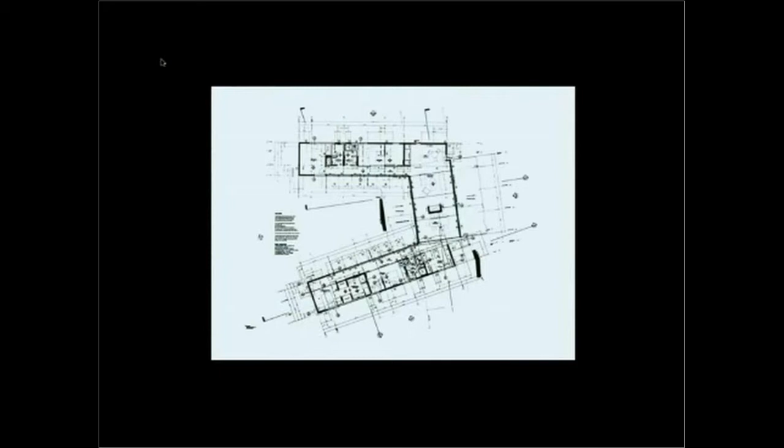The family room is concentrated around a structural pier that assimilates all of the seismic forces as well as the lateral forces of the house, and brings them down in a chimney, which is then the focus of the house. It also provides the only real kind of clear, separate frame for the house in terms of establishing a point of connection to the ground. Everywhere else, we tried as well as we could to float the house.

The house is shielded on all of its sides by a set of movable screens that are able to not only protect the house from burning up in the event of a brush fire. These are perforated aluminum corrugated screens, but they also are able to modulate light, to be adjustable to an infinite number of light conditions. They really call on the user to engage the house through its use and operation.

I really like the idea that the house is this kind of uncertain, unspecific, not exactly related indoor-outdoor space. The idea is that this particular screen system, which is lifted from a garage door opener system into the caliber of a movable sunshade system, establishes on the perimeter of the house a kind of shaded area that defines, expands, and contracts the living area of the day-to-day space.

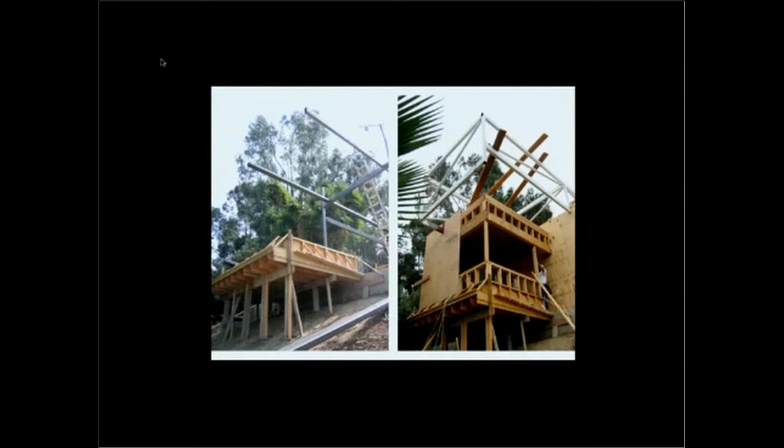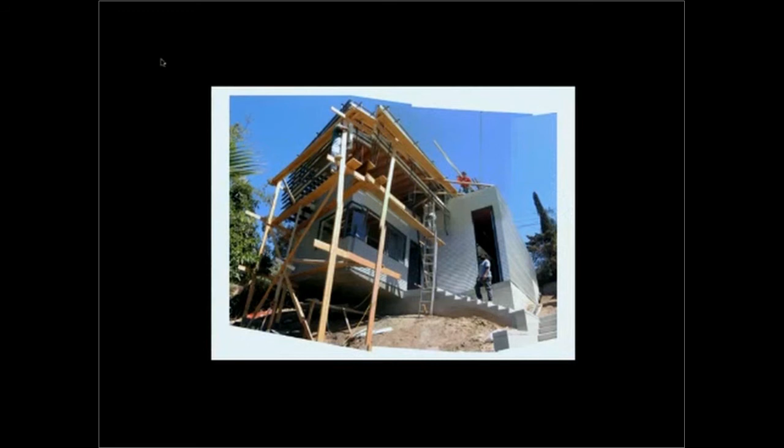So we framed what turned out to be a kind of bird cage up there, and worked on it in a way that was really about making a space with a set of light circumstances around it, a series of light monitors and light-reflecting and light-providing shades. The house was framed as a system that delivered a capacity for understanding light, a system that one would really be able to engage.

I like showing the making of architecture because I don't think the finished photo is always the best one. I really enjoy showing and describing architecture as it's made and in the process of being made.

But when you look at the final piece, you really resolve it as a broadly cantilevered work surface. So the floor of the studio cantilevers and floats and hovers above the hillside. The light screens above bring indirect light into the painting studio and enable the painter to continue their work.

She's kind of bothered by really strong direct light. And here she is working in the space.

For a lot of artists, I think the way to work is a really profound experience, and the relationship to their environment continues to provide an understanding of how the work itself evolves. I think that relationship to the way artists work, and the broad spectrum of relationships architects work with, really matters. It matters how people work, how you develop work, and how the process of developing work imagines architecture.

This is a corrugated, basically cement panel on the surface, glazed at the top with a series of fins that simply deflect light.

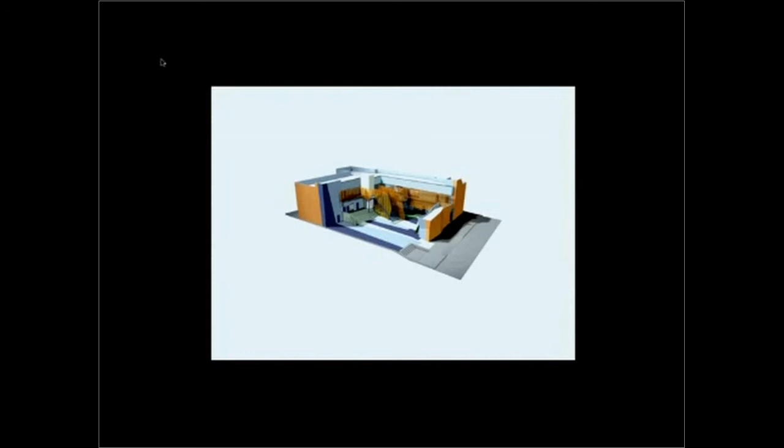When the school came to us and asked us to convert the building into a school, what we tried to do is use what the building lacked, what it missed, what it hadn't included in its structural diagram, to reimagine it differently by adding to it. So what we did was surround the building with a stabilizing system, which consisted of a light stabilizing system, a soccer ball stabilizing system, and a seismic load stabilizing structure that enabled the upper levels to function as exit corridors and outdoor teaching spaces, and the downstairs to provide more of the functions of a playground.

During the construction, we studied this a lot. The slots and slats of the screens you see are made of a product called Nexwood, which became interesting to us not because it was about the future or made of wood, but because it's made of a wood binder pulp recombined with resins into something of greater durability than any wood, but also more dimensionally stable, which made obtaining the curves we were looking for really fun to play with.

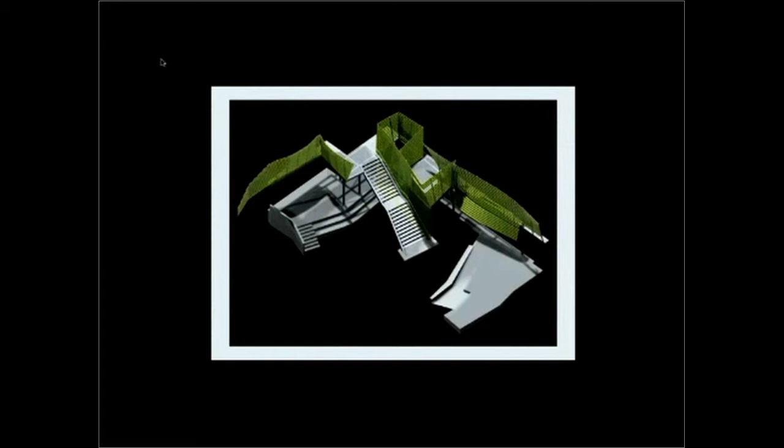The school then uses those spaces both as refuges, as places to hold graduation and so forth, and in the day-to-day use of the playground as a place where kids can just gather. So these are the elements that we added - they're actually the architecture of the school, not the school as a whole. Our contribution to the building was primarily a set of decks built up to stabilize the parking deck, in addition to the seismic system - everything that's green up there - and the circulation system for the exiting required to operate a school.

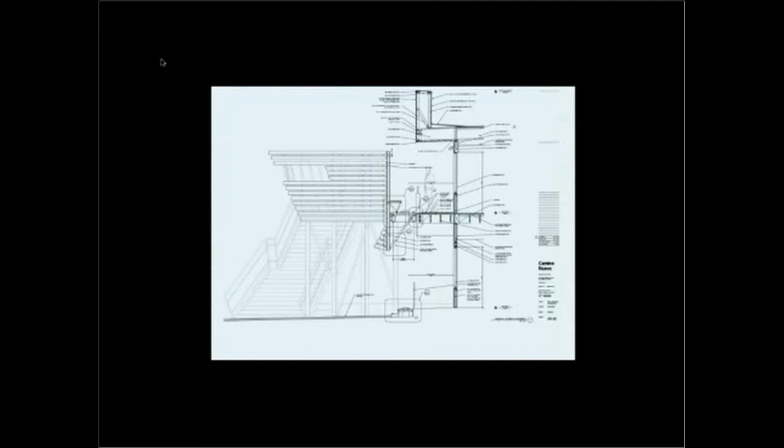I'm adding the sheet from the working drawing set simply because it makes very clear where your role as an architect, in a way, and the existing building suddenly get blurry when the two systems start coming together - right where that framing meets the deck. There's a set of interfaces which to me are really an important part of how architecture operates, which is by interlacing itself with what exists in the world - we find a greater voice for the practice of the profession itself.

These are showing a set of variations, which everybody today would be kind of bored with, but at the time were interesting enough to us because they show variation within a framing system that allowed us to obtain a curvature that was solar resistant. In other words, it provided shading, but it also was a deflective surface that protected the upper classrooms from downstairs play.

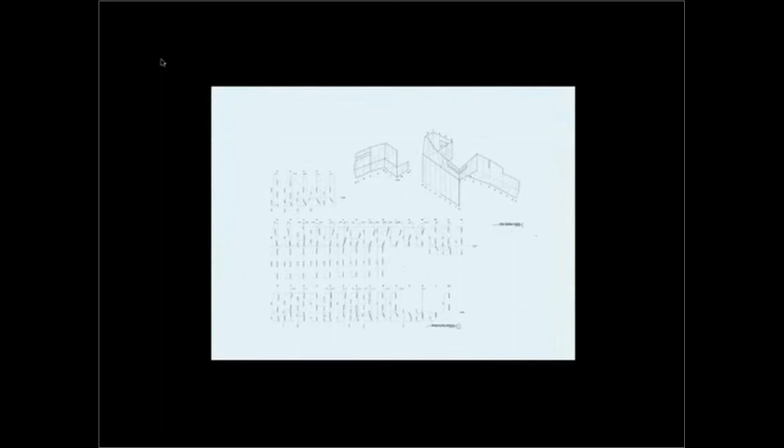And so behind those screens, there's a set of outdoor reading spaces and classroom spaces, so that in California, where it happens to be comfortable most of the year, learning and the idea of learning really becomes embedded with - well, why do you need to be inside all of the time? You can also be outside, and you can do it in a way that has all of the shelter and protection that little kids might require.

I think it's important to note that the school was invented as a notion for a priest who ran, and runs, and continues to run a sort of employee-owned corporation for first-generation immigrants from Guatemala. These are the kids of families who go and work on the west side of Los Angeles - they basically clean homes. Their kids were left as latchkey kids, and now instead of staying at home, have a school to go to. It's really his imagination, and working with him, that's made a school - not a daycare, for example - come through.

The streetscape happens to be something that's fairly cloistered - it's in a fairly tough part of the city. We really liked working in the inner city, in the sense that we don't see it as a no man's land, but rather as a man's land that needs a different set of rules and requirements. So we tried to make up a landscape - we tried to bring a set of opportunities for the neighborhood, instilling something they haven't seen, like a set of trees. Believe it or not, in some places, just seeing landscape is something new. So it offers a whole new way of gathering for these kids who beforehand just were at home.

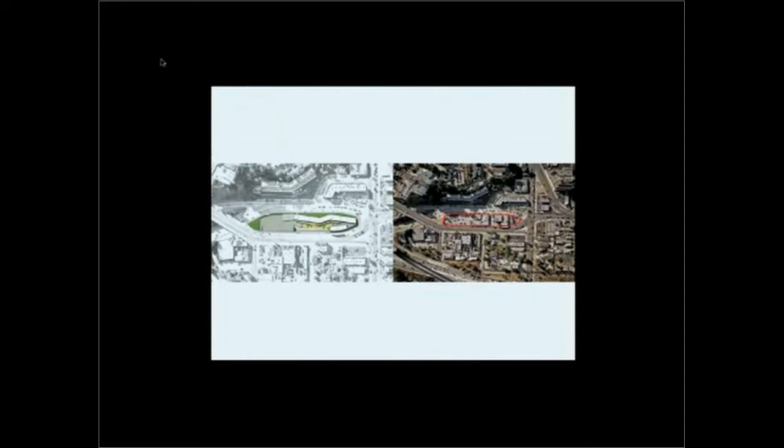So this is life in micro. It's really a way that you have to learn how to work when operationally you're very tight, when intellectually what's at stake is very broad, and when the means of doing it are limited.

These are just a couple of the thinking points during the process, but the thing that seems really interesting to me is the elaboration of the shaping of the site to the shaping of the building. So the building and the site are confluent. They're the same. The building and the site, because of their close fit, are embedded into one another.

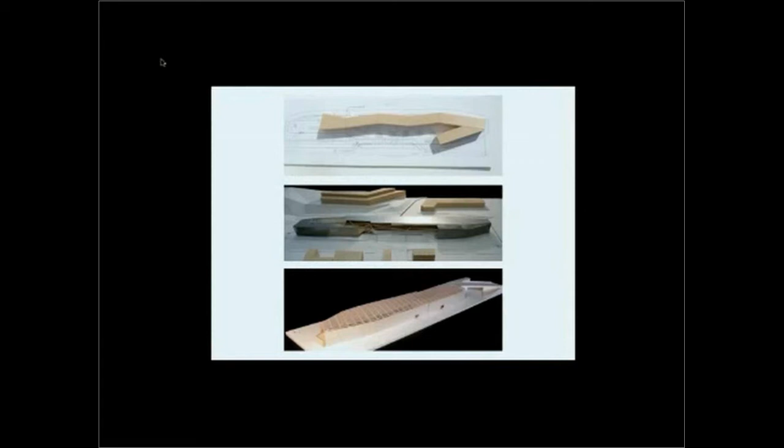The S shape, the way that we took charge of the site, was really by saying, okay, if we string the classrooms together, we're able to get a greater fluency between how they all interrelate, between what's downstairs and what's upstairs. But to the street, we need to get a kind of slightly tougher edge.

So we laminated the exterior with a perforated aluminum screen, behind which we've been able to paint a sort of color field. And the aluminum screen itself has been anodized with color. So we create separation through a kind of active pattern on the building.

This is in a very highly trafficked area of the city, so people are zooming by at 80 miles an hour all the time. And instead of seeing that as something we needed to resist, we actually learned from it. We learned how to move with the traffic, to move a building through the traffic. And to me, this speaks to a way that architecture has to look at the world around it, not necessarily only as something that needs to be resisted, but rather something to pick up from.

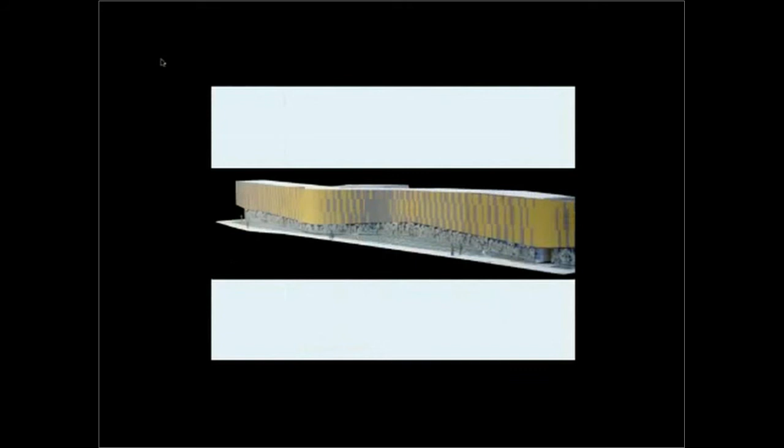So I think the reason I'm showing this is particularly so that you can see the wrapping. The volumes themselves are very, very simple masonry block. It's a very cheap building to make.

And then over that, we've wrapped these other layers of mitigating surfaces that deal with noise, that deal with growing stuff, that deal with light and sound and so forth, so that the architecture layers itself into the main core of the building as a kind of intelligent system that's responsive to the conditions immediately around it.

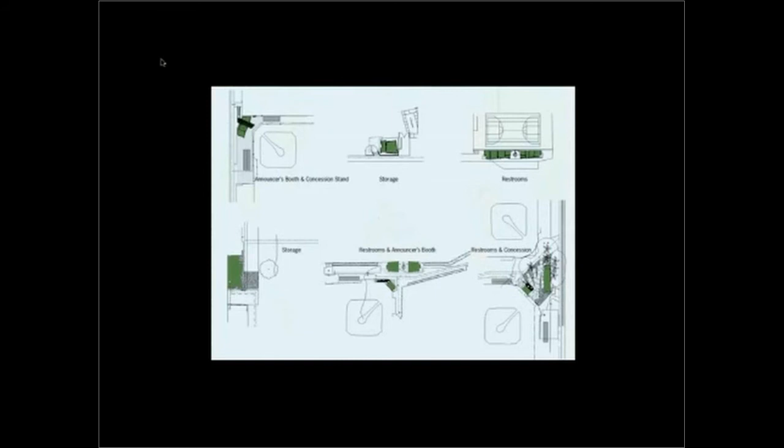These are just all the little parks buildings: storage, restrooms, announcers booths, concessions and so forth. These are the little typological plans that are part of the array of park systems. And then the buildings themselves turned out to be more like little worms that work their way through the landscape, very simple post and beam systems with prefab panels on them.

The prefab panel was what we decided to take on, through milling technology at the time, by calling the manufacturers and asking, does it really matter if the surface is like fake rock? Could it instead be a wave, or a set of dots, or some other kind of surface that matched what might be going on in the park, while still working exactly within the system without demanding any change to how the factory set things up? So our intervention with the factory, with the new technology that enabled us as architects to operate with the community, became a conversation that took something that only intended to be a bathroom and made it into a work of architecture.

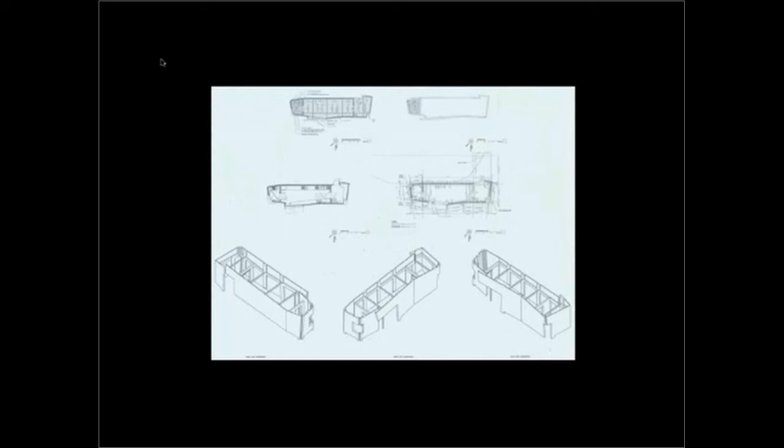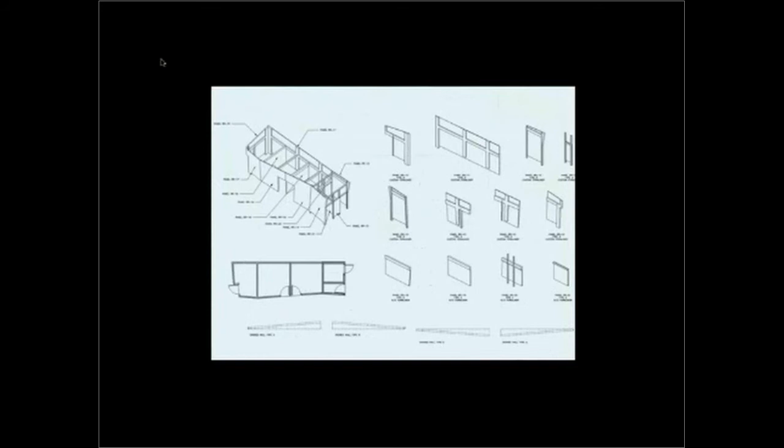So the precast panels have all these parts and pieces which we studied. You have to get to know the subject you're working with. These are the main building components, and we enumerated them all, saying okay, here's what we can do with what we have. Then we reassembled them the way we needed to make these little components, and developed a family tree of all the possibilities and permutations we could deliver, making an endlessly open system with no particular boundaries, but with an intelligence able to respond to anything that would come at it.

So if there was no lawn but hard surface, if there was only playing field but no public area, all of the circumstances and unknowns of public parks as they changed through the city of Santa Monica were able to be contended with through a new architectural language that came out of simply understanding how to interface with an existing technology, something we'd adjusted, and its performance.

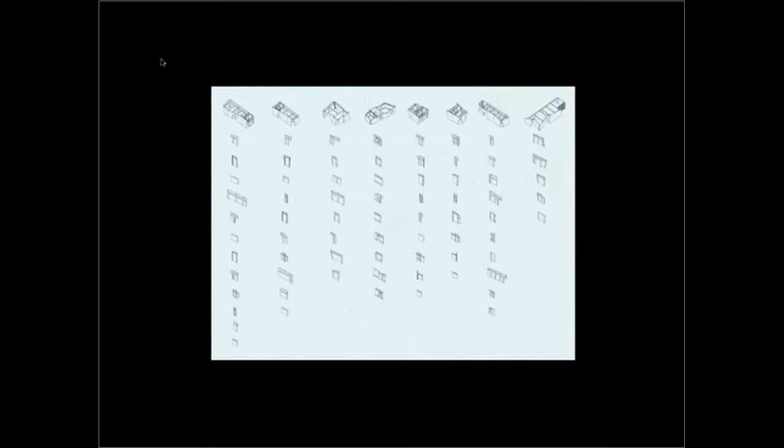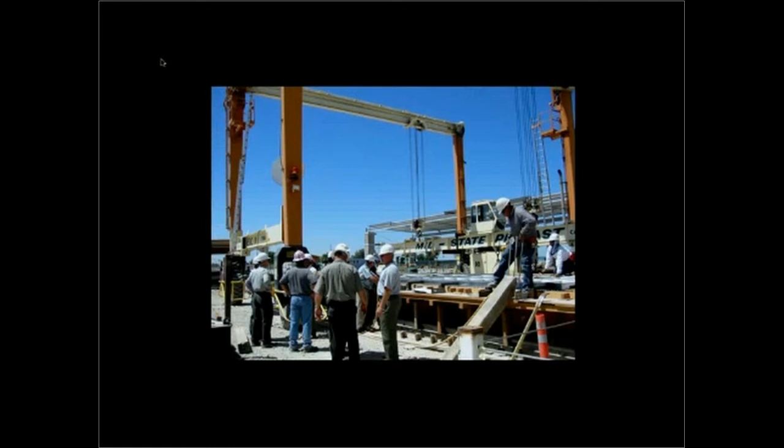So the fabrication part had to do with reestablishing the mold. We looked at how, when you change something even as slight as a surface in an industrially made object, you have to engage a whole group of experts who are entirely focused on looking at the way the world works, but like this. That's okay, because they have a huge amount of information you can draw from, and at the same time you can broaden their work by adding a component they hadn't understood, which brings together a new and different way of working.

So we tried to take the quality of concrete, which you never really conventionally associate with concrete, which is luminosity, and interject another material into it through the process of molding that gives the two materials something that's completely an anathema to the way either one would behave, but gives something to the overall architecture that's completely liquid. When you look at it, you can't quite tell if the building is made of gel, concrete, or paper. It's a difficult kind of material. And it's really what the opportunity is today - to not just assume concrete is what you learn in the textbook, that it can have virtually any given number of alternates.

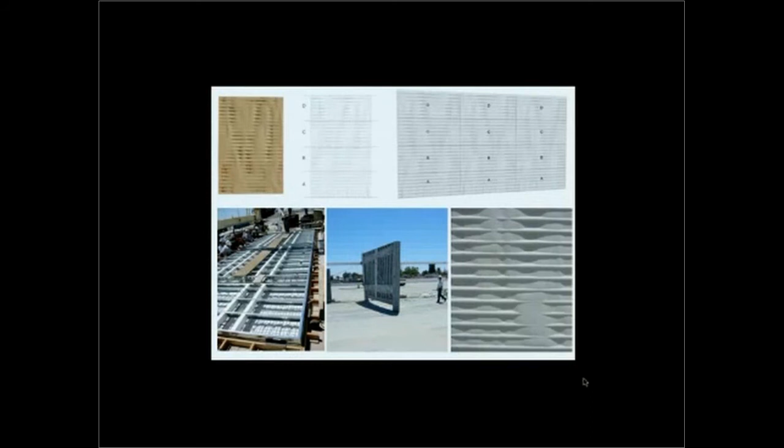And here are the panels being brought together in the field. They're cast in Texas and then shipped across the country.

The building, as it ends up, is basically a backdrop, which is exactly what we wanted to do in making Parks buildings. They were neither heroic nor intended to be more socially or civically significant than what they were intended to do as storage buildings. They are at the bottom of the field, in the back of the picture, and very much like that.

It's not really until the daily use, your daily encounter of them as you go and get the tennis racket or the football that you need, that you really realize the surface of the architecture and the architecture itself is delivering a very different kind of story to you, that the expectation you have is absolutely unexpected. And I think that's a really important lesson - that architecture, as its obligations shift, as its capacity to always be foreground diminishes, it can still be foreground as a background building and be more intelligent than anything else around it.

The little concession stands with kids lining up behind them speak to that same idea of how concrete can be machined, but machined in a way that goes beyond the pour - you usually tend to think of concrete being poured in formwork. Now we're not looking at formwork anymore, but the idea of panels that are molded, that are shaped, and that are given a life that is liquid.

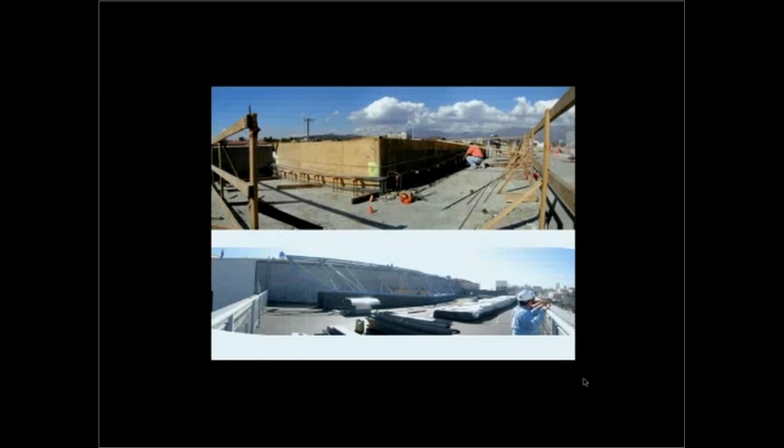Artists liking daylight and liking studios and access to a visible spectrum of daylight, we were really concerned that getting good daylight into a very deep building was going to be difficult. So our approach was simply to do what many would do, but in a set of studies, really decide to take a set of giant bites out of the building — not so much to make a new architecture as to take away pieces and parts of the old building in order to bring infrastructural requirements down to the students. That means light, air, view — all the things that promote your imagination, so that your imagination isn't like in the room we are now, entirely surrounded by darkened walls and people falling asleep.

On the roof, we made a system of openings that tried to take advantage of something we became really interested in, which is the variation of things as being neither here nor there. The idea that daylight itself shifts — there are moments in Southern California with intense sun, and also moments of gray. So we made these skylight scaffolds to hold skylight balloons, a system made by Foil Tech in England, which you may know better from a building Foster designed for Cornwall, I think it's called the Tomorrow Foundation, or Future Foundation, something like that. It's a building intended to occupy some role between now and tomorrow, and it encloses a part of the landscape.

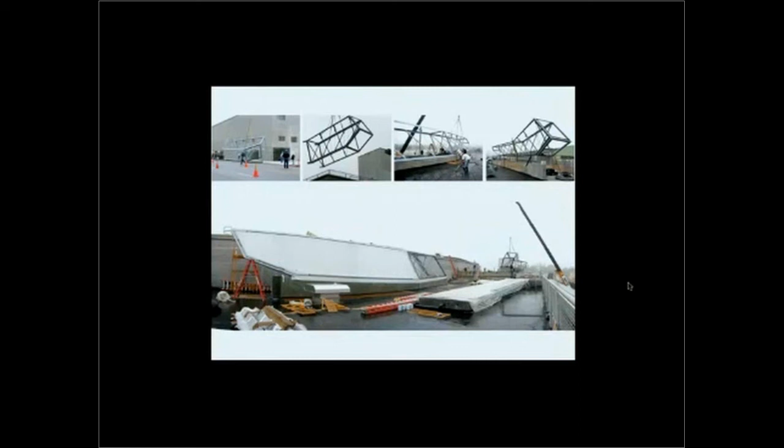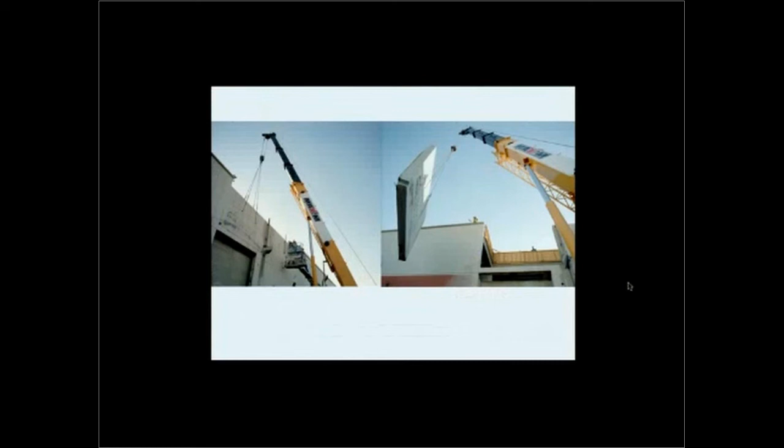Our version of that — we traveled to England to look at it, but really we'll show you how those Mylar technologies operate. The removal of the building, to open it up, was done by saw cutting the building, removing great gashes, just doing it in a really dumb way. There's sometimes no other way to do something — to say, okay, I want that there, taken away and moved down to there. Existing buildings sometimes have a way to teach us that, in the best of ways. And when you have to introduce daylight, they have a wonderful way of doing it. What you're left with is a system that's really about scattering and diffusing light into an interior landscape intended entirely to promote the teaching and thinking of fine art.

So the strategy is this huge set of skylights above — I think this one is over 65 feet long — with a clad balloon envelope made of a 3-layered tier of Mylar. It's a ballistic Mylar, so you can shoot a gun at it and it won't tear, they tell us. The surface is impregnated with a resistance pattern, which you can kind of see but not really, because the light is coming from inside in the evening. That's a baked-on ceramic, and we worked on that with Bruce Mau, the Toronto designer, to come up with the closure, the diaphragm for the system.

The way it works is this: when sun hits, these things expand like a big bellows, and the pattern on both sides separates, and the angle of incidence of the light is sort of stopped. When it comes together, more light goes in on a gray day, and the building is able to operate with more daylight.

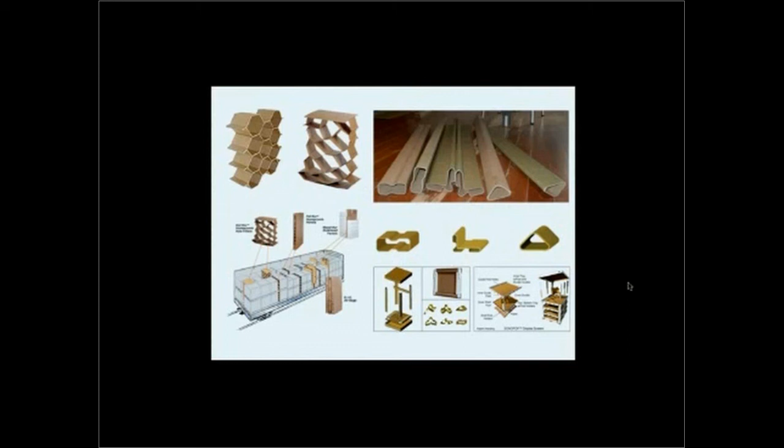We thought that was interesting because not only are they part of the day-to-day world we all inhabit, but they also help ship stuff across the planet. The system for us involved two components: this extrusion documented on the slide, and the actual baffle material, the accordion material for the shipping cell, which comes in generally 12 by 8 foot by 8 foot blocks. It's a huge volume you can carve in some ways. Generally refrigerators or motor parts are pushed into it, and that's how it's stabilized to go across country.

As we developed our milling practices for it, we realized we can shape those into a set of pier-like components. The piers would be structural, but inversely structural, in that they'd be in tension, and the rods that went through them - the shipping container rods I showed before - are the things that keep the accordion spread apart. The piers, which are inverse piers to how piers usually behave, are a family of 11 shapes that can be combined in different ways to make the spaces of the building.

This is a new topography, a new kind of plan for that space that makes a series of points of view, places for students to meet in the school. If you made a plan of the milling before it takes place, as a surface about to be milled, this is the drawing you'd get, in compression, the space as it's compressed.

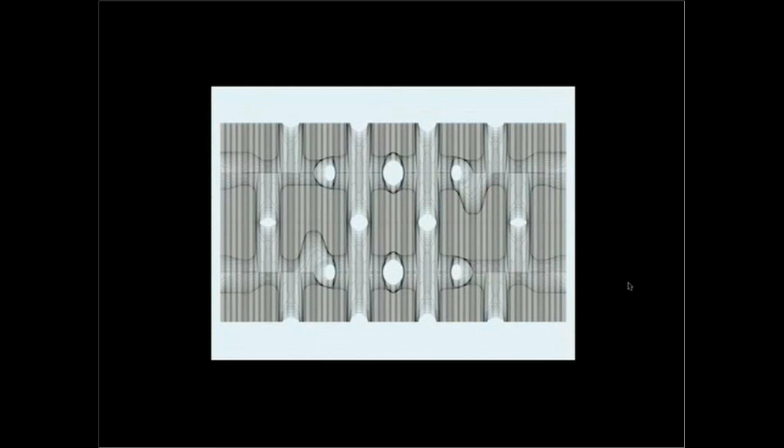Then as it was unfolded, the 66 plates unfold in the space of our gallery and open up and consume that volume. The volume is 24 feet tall, almost 60 feet long, 26 feet wide. You can see those things opening up and moving across.

So little by little, you're developing an entirely new way of taking a material made for shipping, from a set of conventions that are absolutely domestic, and reading them as though they could be interpreted and used in a different context to make a new kind of spatial network - one that's about how students can roam to discover a new set of intelligences and ideas about architecture.

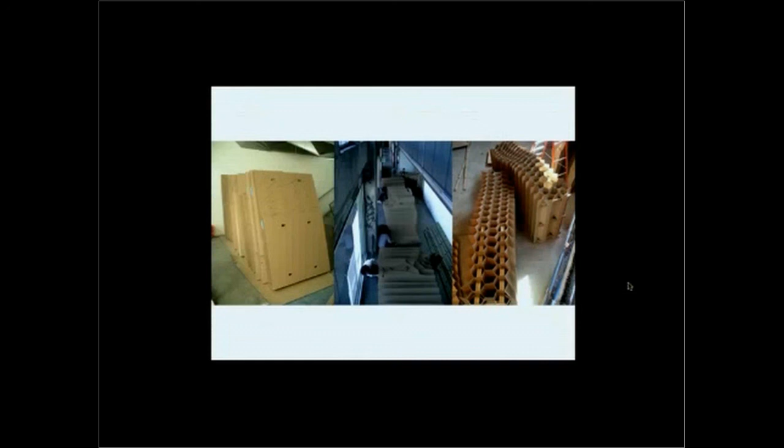This was all done, assembled, and designed with the students. Here are the big piers being assembled in the hallways of the School of Architecture, entering the gallery, and then in their installation, moving through and taking shape in the gallery.

So here they are - a set of aspiring and open-ended spaces. It's a network with no particular end or beginning. It's a rhizomatic space from the standpoint of how architecture enables ideas to thrive. The idea that it has no beginning or end is really super important.

It's super critical because architecture has, in fact, for us, no beginning or end. It continues and starts at any given number of points—points of conjunction, points of operation, points of intervention. They continue all to provide a way for each one of us to work differently, but we don't have to work in the same way.